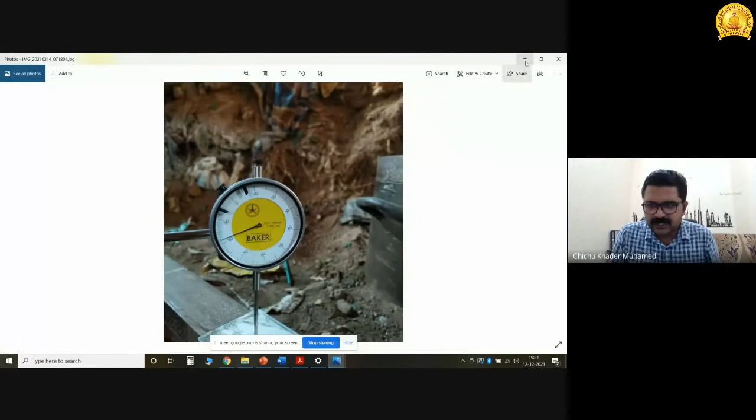So there will be a safe load already assumed for a pile load test, for the design of a pile. So if it is 50 tons, we are assessing whether the pile is capable of taking that much load, or what will be the load that the design can take. Sometimes if we are designing for 50 tons, if the design is over-designed, the pile may take more than 50 tons.

Initially, I am showing you various equipment because when I tell you some technical terms, like dial gauge or pressure gauge, you need to imagine what that is, or you should have an idea regarding the pile.

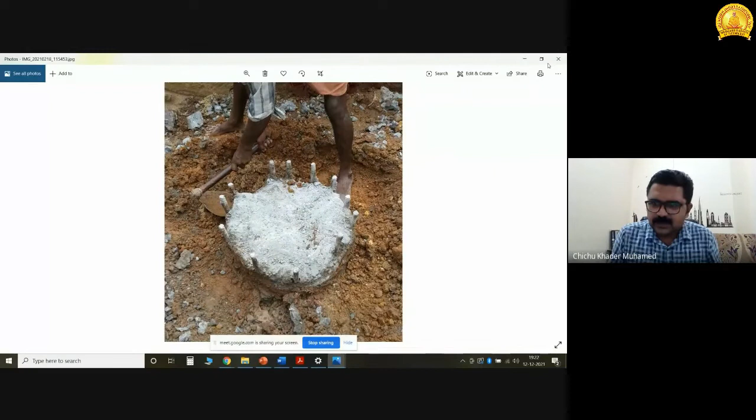This is the pile on which we are going to apply the load. Initially, we have installed the pile, then there will be reinforcement in the pile. This should be cleared and prepared, the pile head should be prepared for the load test. So this is the pile we are going to apply the load on.

And finally, what we need to get is the total settlement of the pile, then net settlement of the pile, then rebound. Rebound is nothing but, initially we will give a load, and after maintaining that load for some time, we will release the load gradually.

So initially we will give gradual load. Then after maintaining the load for some time, we will release the load, and at that time the pile will rebound. If there is some settlement, the pile will rebound from its position. So the net settlement shall be calculated, and the rebound percentage is very important. I will explain it later.

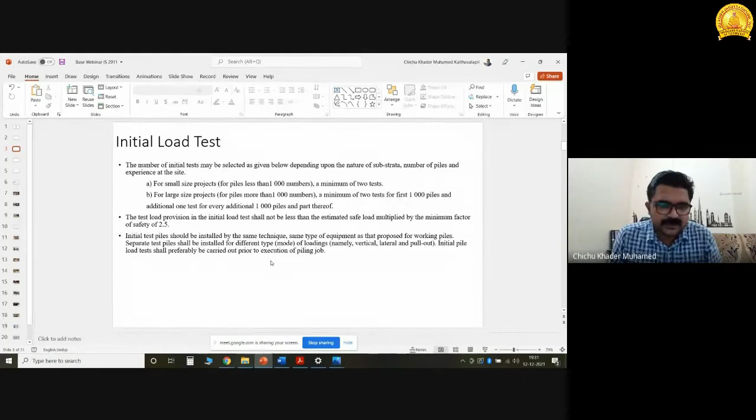So after installing the working piles, we need to check whether the pile is capable of carrying the design load. For that we use the routine load test. Routine load test means we give a load of about 1.5 times, that is the factor of safety the designer has given for the limit state method. So in the routine load test, the 1.5 times load shall be given.

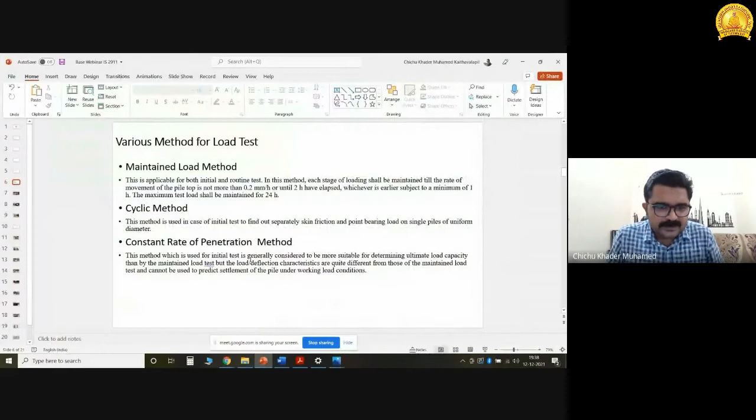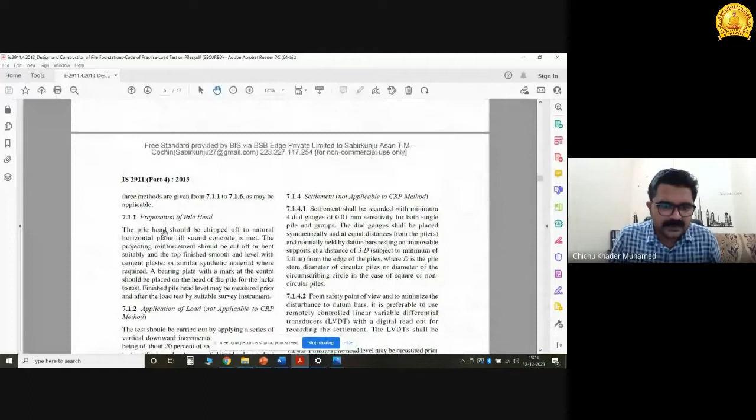Preparation of pile head: the pile head should be chipped off to a natural horizontal plane till sound concrete is met. The projecting reinforcement should be cut off or bent suitably, and the top finished smooth and level with cement plaster or similar synthetic material where required.

A bearing plate with a mark at the center should be placed on the head of the pile for jacks to rest. The finished pile head level may be measured prior to and after the load test using a suitable survey instrument - using a dumpy level or total station, we need to check the level. I'll show you the photograph.

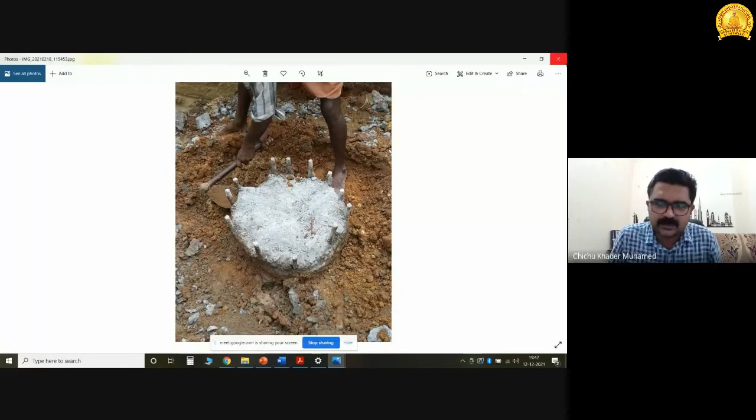Here, this is the pile chipped. The concrete is chipped to the natural horizontal plane, and these are the projecting reinforcing bars. So we will cut the projected reinforcing bar using a grinding machine.

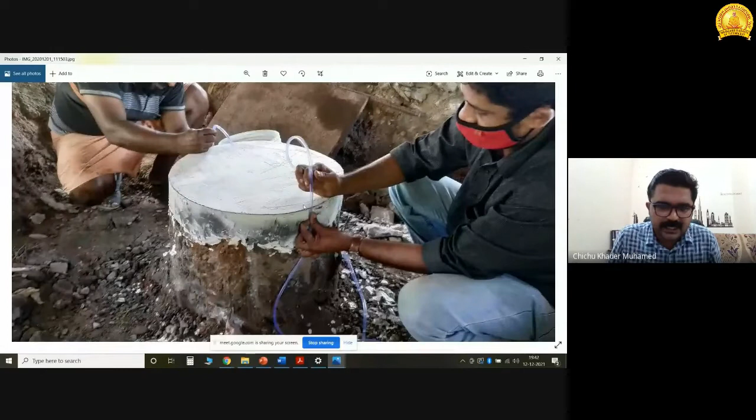After that, see, this is the pile head prepared using cement mortar, and it is level. Using a water level, we will check the level. Here you can see the pile head is made to a horizontal plane, and the levels are checked using a water level.

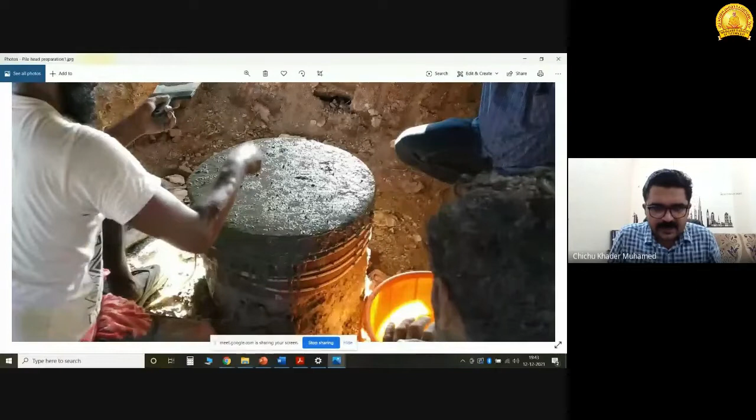And after that - this is another pile, actually we have done three pile load tests at our site - this is the mortar making it horizontal, and then plaster of Paris is applied above the horizontal plane. This is where we place the jack above the pile.

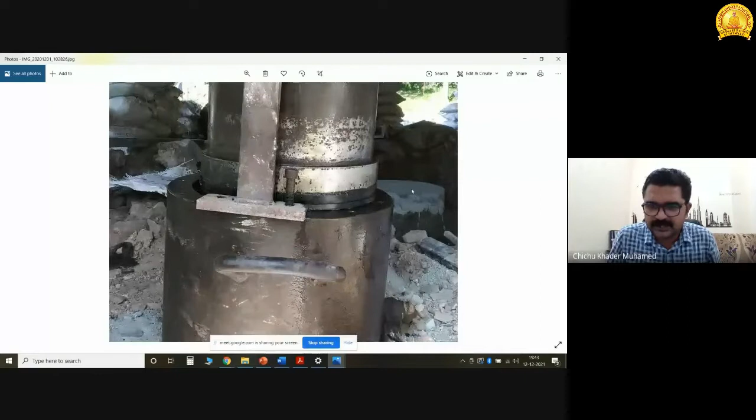So this is the jack, and you can see the prepared surface here. We will place this jack above this pile. That is the first procedure, pile head preparation - we will initially prepare the head.

Then the method statement shows what is applicable - how much load is to be applied on the pile. The test should be carried out by applying a series of vertical downward incremental loads. In the maintained load method, we give the load gradually in increments. If we need to test a final load of 67.5 ton and suddenly apply that load, the soil may structurally fail.

The pile concrete may fail. So we will give the load in each increment of about 20%. The code says about 20% - it is not exact, but nearly 20% of the load shall be given in each increment. So what is an increment? I will show you.

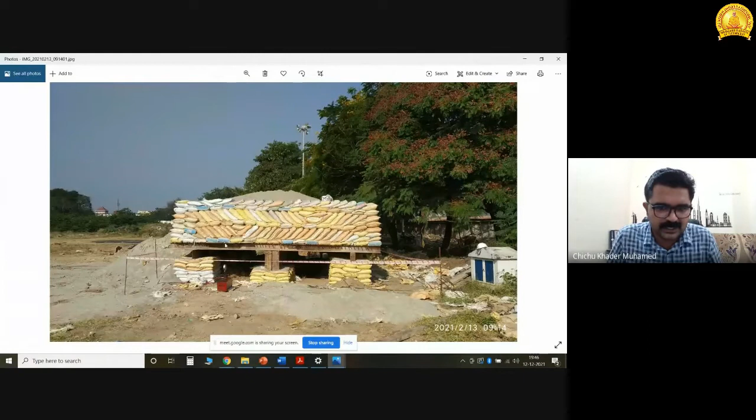So why we are giving 25% more load is when we apply the load, the central ISMB, this central section will be taking the load, and there is a chance of this to be overturned. The entire arrangement, when we lift this using a jack, I think you can see my pointer.

Can you confirm this? My point. Hello. Madam, you can see my pointer, right?

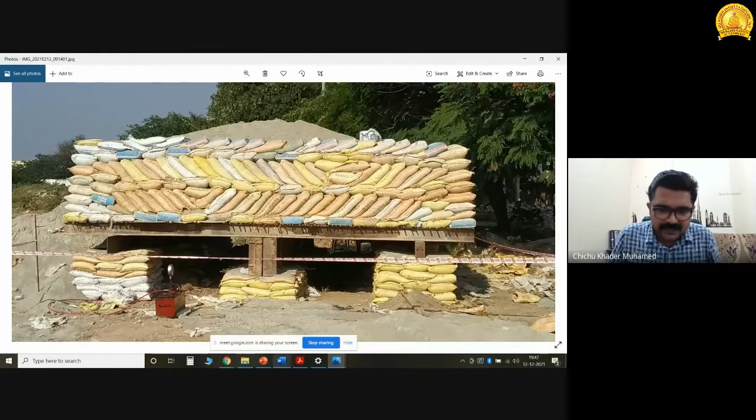When we apply the load using a jack, this section will be moving up, and there is a chance of this entire arrangement to be overturned. So we will be giving a support in these two here, and some reaction, some load will be transferring to the ground through this load. To overcome, to reduce that effect, we are giving 25% load.

So the final test load shall be 1.5 times the safe load, and the final load on the kentledge shall be 25% more than our final test load. That is in the code, clause 7.1.3.1: the reaction to be made available for the test should be 25% more than the final test load proposed to be applied. So as per the code, we have given 85 ton total load on the kentledge.

Then the next procedure is about the kentledge, how the kentledge should be placed above the pile. The kentledge will consist of sandbags loaded over a platform built up of rolled steel joists, supported clear of the test pile. This is the kentledge, and these are sandbags at the border of the arrangement platform.

In the center, we have just placed sand, and we are calculating the load based on the specific gravity: volume into specific gravity will give us the total load on the kentledge. That's how we are assessing the load on the kentledge.

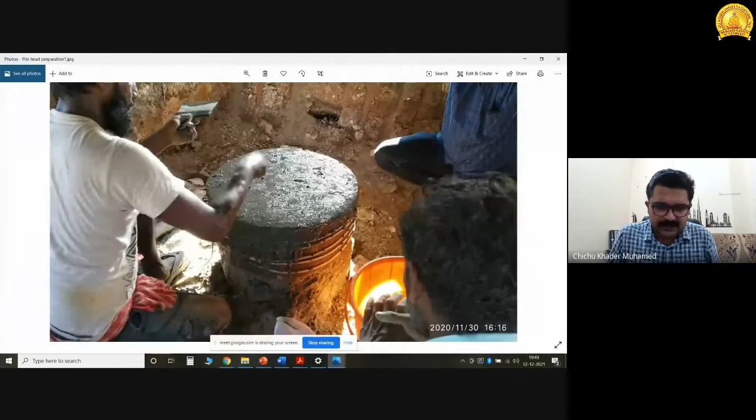And the kentledge shall be 25% more than the required final test load. Care will be taken in the placement of kentledge on platform to ensure that the center of gravity of the total load coincides with the axis of the pile. This is the axis of pile, this center point, and we will be checking that the kentledge's center of gravity passes through the axis of pile.

So after preparing the surface of the pile using a plumb bob, this picture shows how we are making that arrangement. This is the center axis of the pile, and the midpoint of the kentledge is shown here in the tape. We are ensuring the kentledge is placed at the axis of the pile, so that there will not be any eccentricity on loading. This is the arrangement for checking during the process.

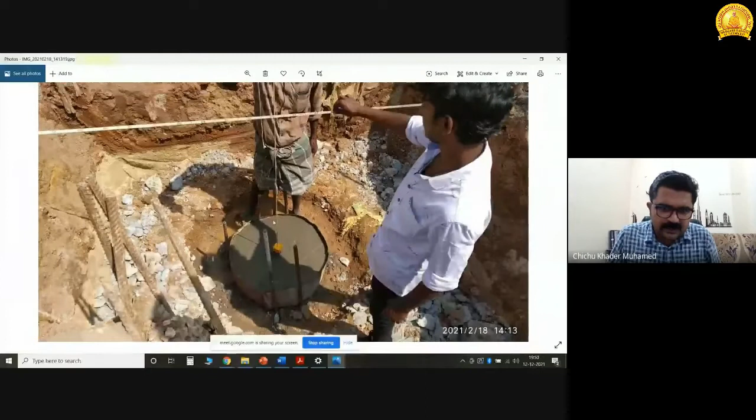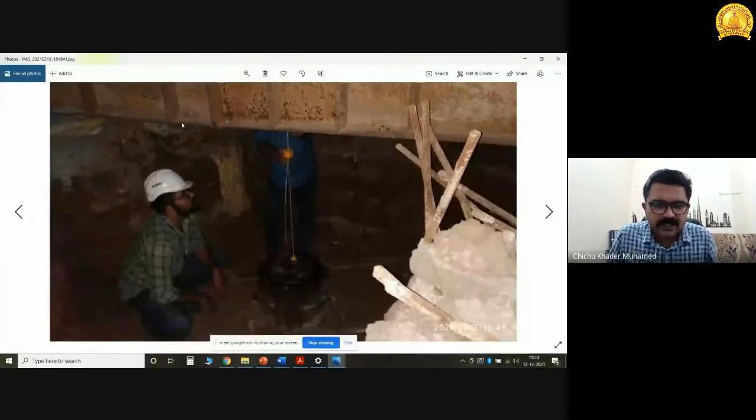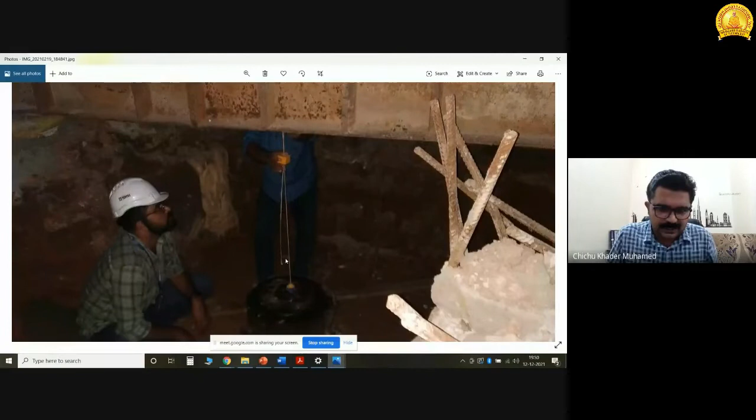From the very time of pile head preparation, the engineer in charge shall be checking every procedure. We have to check every procedure, so using a plumb bob, we are ensuring the line of loading. After the kentledge is placed also, we are checking it using a plumb bob: the center of the kentledge against the axis of the pile. That's how the kentledge is placed directly above the axis of the pile, with the center of gravity of the kentledge aligned.

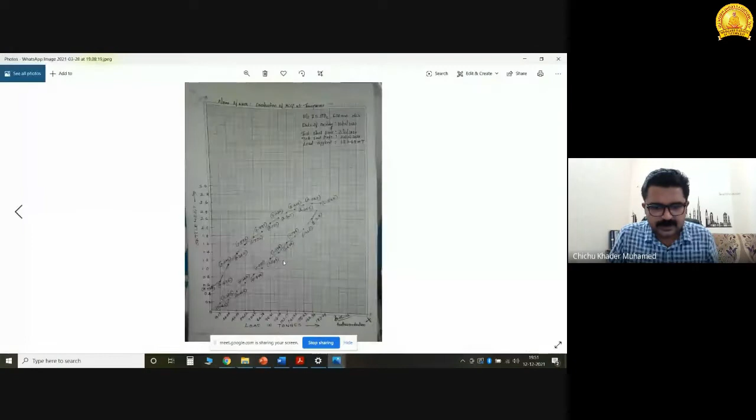I think I am showing this for the first time - the pile load test. This is the final result of the pile load test.

We need to get a graph of load versus settlement, with load on the x-axis and settlement on the y-axis. So for each load, we need to get the settlement.

For each increment, we are plotting the settlement in a graph, and this is for the rebound. This is the final settlement. Then when we release the load, it will come to 0.5. So it started from 0, then went up to 2.58 in our test, then came back to 0.56. So this is the net settlement of the pile, and from this we are calculating the rebound of the pile.

The settlement is measured using dial gauges. There should be a minimum of 4 dial gauges of 0.01 mm sensitivity, that is 1 by 100 of a millimeter sensitivity. This is the dial gauge.

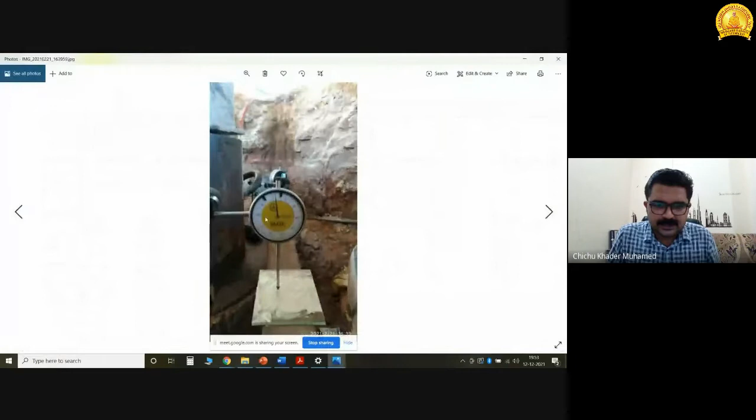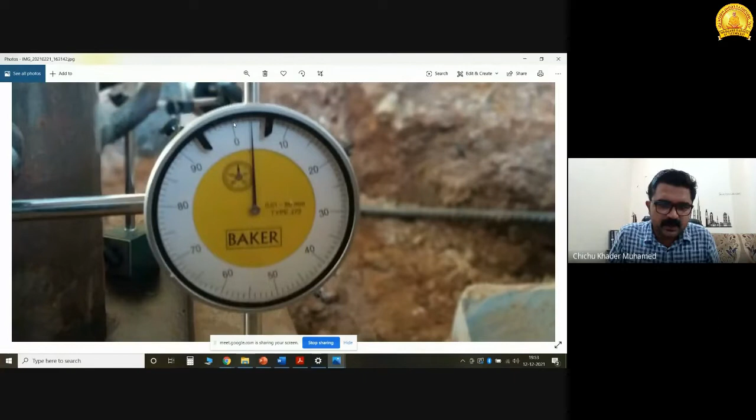This is the dial gauge we are using. Its least count is 0.01 mm, and this dial gauge can measure up to 0.01 mm to 10 mm.

During the pile test, it is very important - even a small vibration will change the reading of the dial gauge. So we are using 4 dial gauges, and we will number them like this.

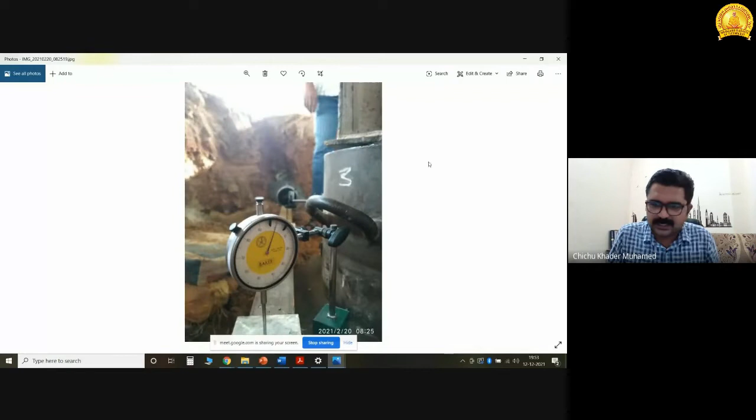This one is the third one, then fourth one. We are placing these dial gauges on a datum bar here, and one leg of the dial gauge will be placed at the pile head. This is the pile head. A 10 mm steel plate is placed over the pile head, and we will place one leg of the dial gauge over it.

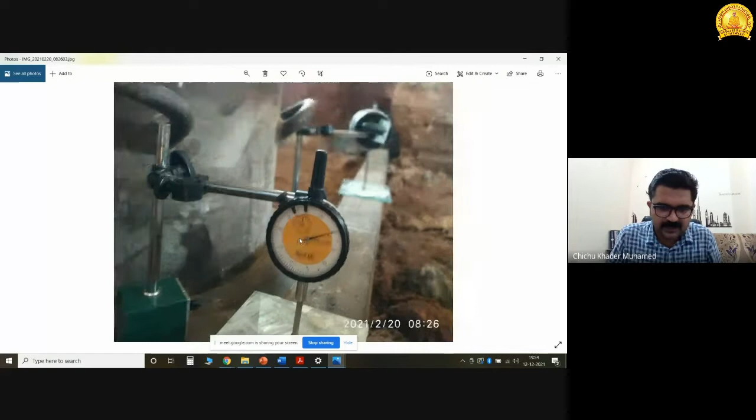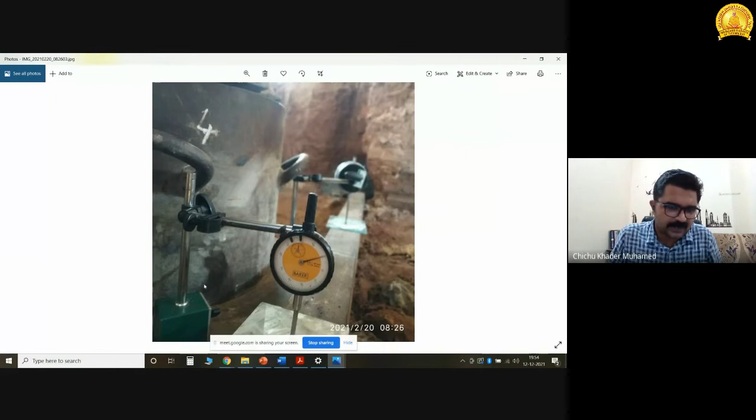Then one leg of the dial gauge will be placed on the datum bar. So when some settlement happens here, this dial gauge will show the settlement reading - this is the differential reading given. We will get the reading from here.

This is the dial gauge of 0.01 mm sensitivity. When we go inside the loading platform, this is the datum bar. There are 2 datum bars on either side of the pile. Then we will place the dial gauge here, with one leg on the pile head.

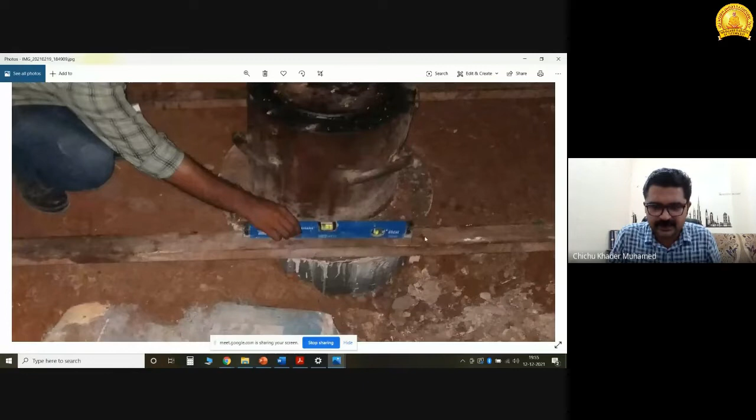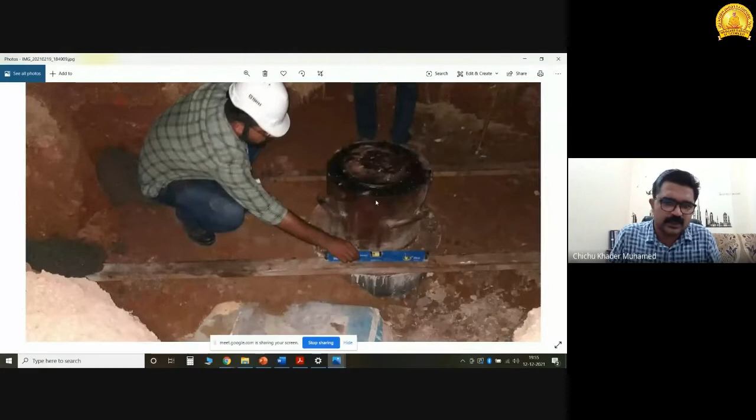The dial gauge will be placed here. The datum bar will be concreted to ensure there is no relative movement during the load test, because when we walk through this ground, there is a chance of movement of the datum bar. Because of the high sensitivity of the dial gauge, this should be taken care of very much. When taking readings, we have to take care about vibrations also.

So only 2 persons will be coming down to this area under the gantry. Here I am sitting under the gantry, so 85 tons of weight is above my head. When I come underside of this gantry, I have to be very careful that the datum bars are not vibrated due to my movement.

So it is concreted on both sides, and the levels of the datum bar are initially checked. If the datum bar is slightly inclined, the reading will differ - one dial gauge will be placed here, one here, and the other 2 on the other side. So if the datum bar is inclined in position, the dial gauges will show different readings.

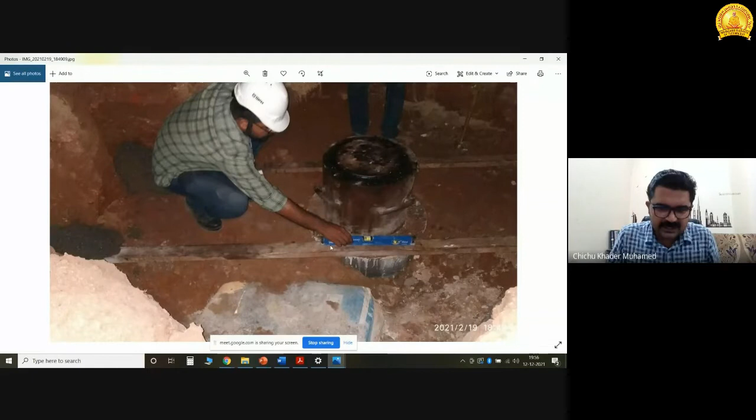That's why the datum bar and its movement is very important. This is the datum bar concreted on either side.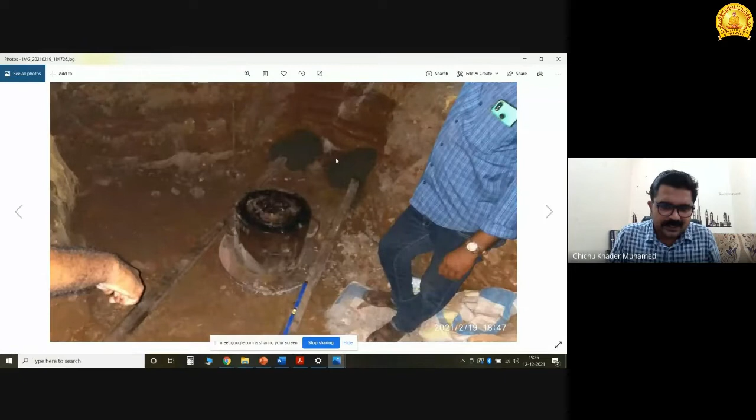For settlement observation, the settlement shall be recorded with a minimum of 4 dial gauges of 0.01 mm sensitivity. The dial gauges shall be placed symmetrically and at equal distance from the pile, and will be held at the datum bar resting on immovable support.

The datum bar will be immovable. When we were following the earlier code, the code insisted on only 3 dial gauges - this is the reading we are getting from the dial gauge reading.

So there will be 4 dial gauges, and we take the average settlement finally. That's why we place 4 dial gauges, that will give us an accurate average value. The recent code says 4 dial gauges shall be used; earlier code insisted on 3 dial gauges. Nowadays we use 4 dial gauges at 45 degrees to the pile, placed symmetrically.

Then about the load application. The test load will be applied by means of a hydraulic jack. I have already shown you the hydraulic jack. This is the hydraulic jack.

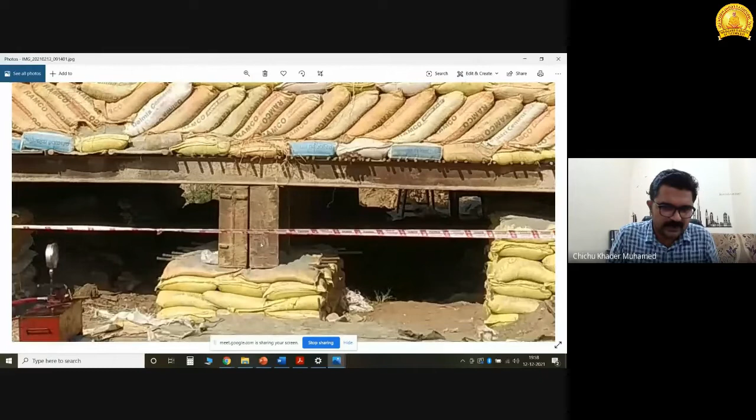This is the jack. The jack will be connected to two ISMB sections, and when we give pressure using the pressure gauge, this is the lever of the pressure gauge, I think you can see it. When we give the pressure, automatically the load goes up, the jack goes up, and the reaction of this load comes to the pile.

The code says 20% of the safe load should be applied in each increment. So here I have calculated like 20% of the safe load is 45 ton into 20%, that is 9 ton. So this 9 ton, nearly 9 ton, should be given during one increment. The calculation of how we get this 9 ton is shown here.

The diameter of the jack is 35 centimeters. Here this is the jack ram, this is the whole jack, and when we apply the load, this jack ram of the jack comes up. So this will be the area which is applying the load to the pile.

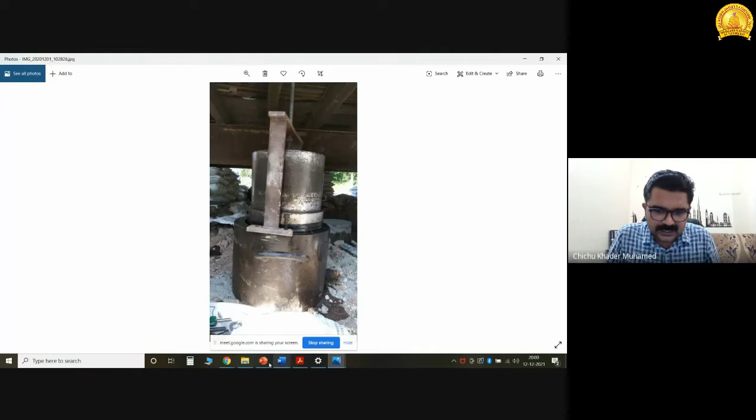So this area, here we have taken the calculation like this: area of the ram is equal to pi by 4 into d square. So we will get the area, that is 961, for 35 centimeter diameter. This is in centimeter square. The least count of the pressure gauge is 10 kilogram per centimeter square.

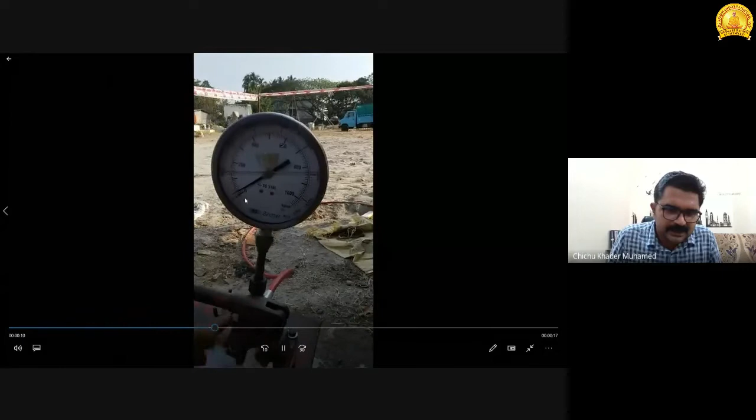Using the equation stress equals load by area, we will get the load, like stress into area. This is the stress here. One division, when we see here, means 10 kilogram per centimeter square stress is applied on the pile. So by using that, stress into area will give us the load, that is this ram area into stress, divided by 1000, since this is 10 kilogram per centimeter square. So we get the value in kilogram, divided by 1000 gives the value in ton.

So 9.62 ton is applied while we give one division increment. So the first increment will be 9.62. Like that, we will give 7 divisions for getting 67.34 ton. Here we require 67.5 ton as the final load, and because this was a routine load test, we have given up to 67.34. There is a nominal reduction in the tonnage, that is not a problem, and that is the load calculation.

So the diameter of the jack, there are various types of jacks. Sometimes if we need to give more load, we will use 2 jacks in parallel. That is a separate assembly. I haven't used it at my site.

So there are jacks of diameter ranging from 30 centimeter, 32 centimeter, 34 centimeter, 35 centimeter. So according to what load we need to give, we have to select the jack according to the diameter of the ram. So that diameter of the ram will give you the load for one division. One division in the pressure gauge means we are applying 9.62 ton.

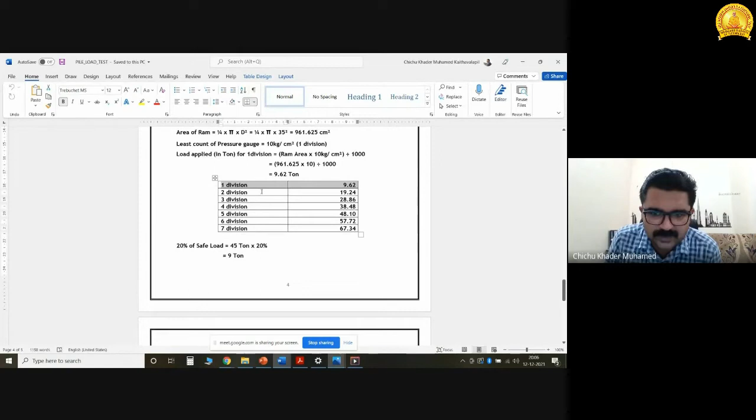If the reading is more than 0.2 mm per hour rate of penetration, otherwise we will give the next division, next tonnage, if it is less than 0.2 mm per hour. So this is when the loading has reached the test load.

It will be maintained for a period of 24 hours, and the settlement reading every 1 hour will be noted during this period. Here I have given the final increment, 7th division, and after that I have taken the readings every 1 hour: 5:15, 6:15, 7:15, 8:15, and up to 24 hours. I have maintained the maximum load, 67 tons, and recorded the reading each hour. So this maintain-the-load method will take 1 day.

Overnight, we need to check for the readings, we have to be at the site overnight. Night time also we need to take the measurement. So for 24 hours, we will maintain the load, take the reading, and record it here.

Here you can see the settlement after the final load has been given. The settlement varies over 24 hours: it's 1.005, then 1.02, then 1.027 - an increase of 0.007 mm. So the settlement is getting increased over the 24 hours, and each hour the reading will be more as we maintain the load.

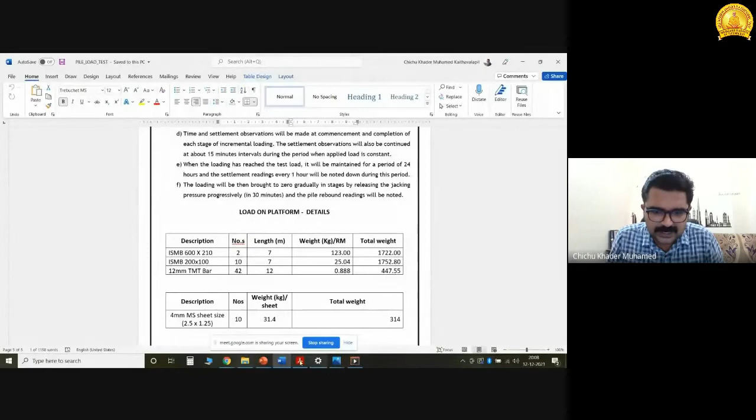This is the process of releasing the load.

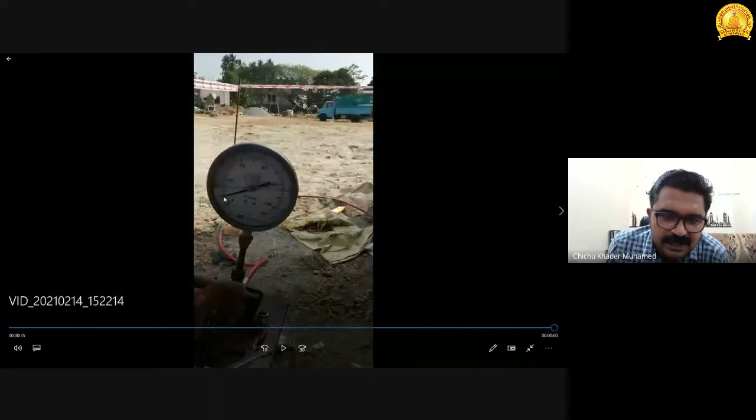See, this jack pressure will be slowly released here, and you can see the pressure gauge reading comes down. During releasing, the jack will be released using a spanner, and the load comes down. When it is one division down, we will again tighten the jack.

So the load comes down to one division, and like that 7 divisions will be here. After fully loaded, the division was 7, and in each hour, for every 30 minutes, we will release one increment, coming down up to 0. This is the final settlement, and after releasing, there is a settlement. The difference in settlement is known as the net settlement of the pile.

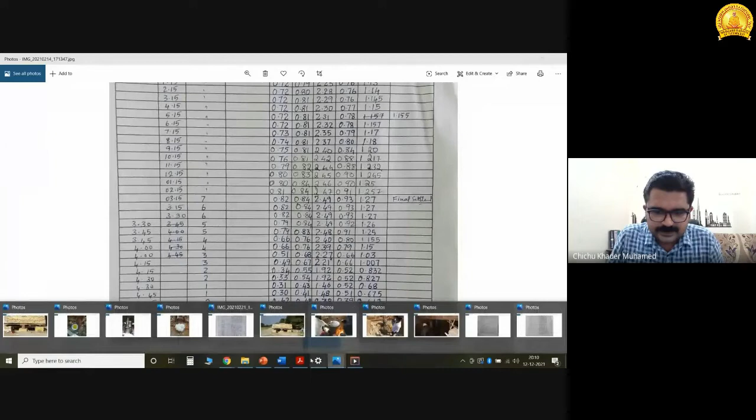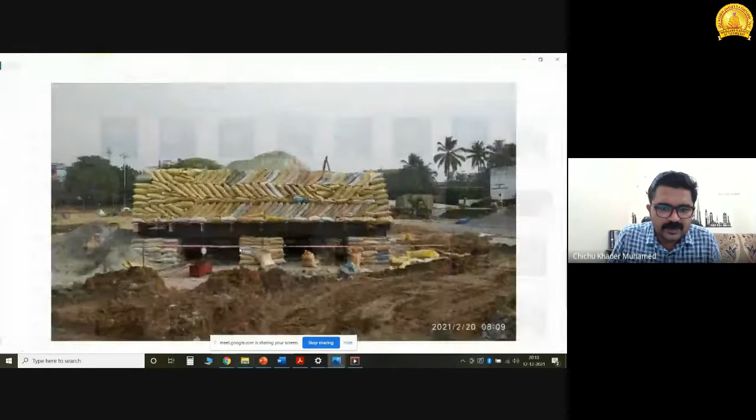This is the calculation for load on platform. The whole test is based on the load which is given on this platform. So this is the platform, and the calculation I told you about, the volume of sand into specific gravity will give the load of sand, and all these steel sections' load is also coming on the pile, so we need to calculate that also.

So this is the calculation. There is one ISMB 600 by 210 in the center. This is the first load we are calculating. There are 2 numbers as 1 unit, combined together. So the load of that ISMB is given. The length of the ISMB is 7 meters, so the running meter length is 123 kilograms, which will give the load.

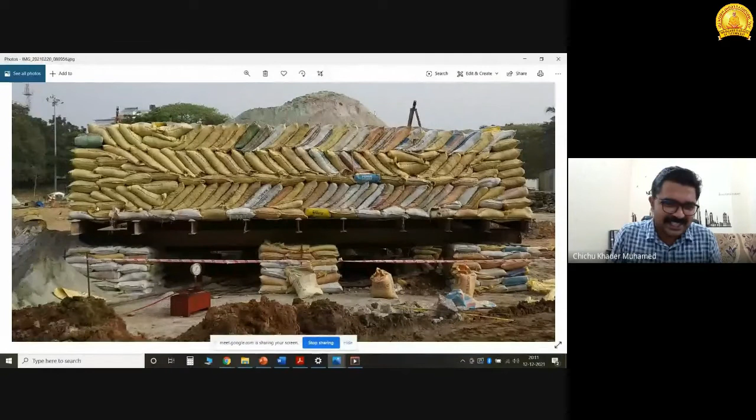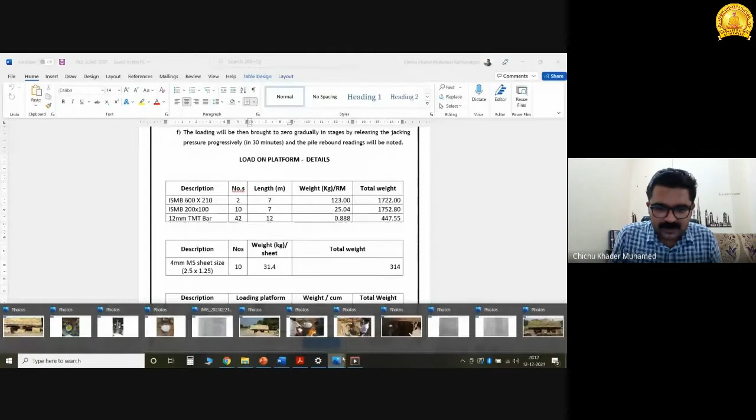Then 10 ISMBs above that, this other longitudinal section. So on the center ISMB, 1, 2, 3, 4, 5, 6, 7, 8, 9, 10. This is another photograph from one of my other sites, not for this calculation. So there are 7 meter length, 10 ISMBs, and the weight is 25 kilograms per running meter, so we will get the total load here. There are also 12 mm diameter bars placed above this ISMB.

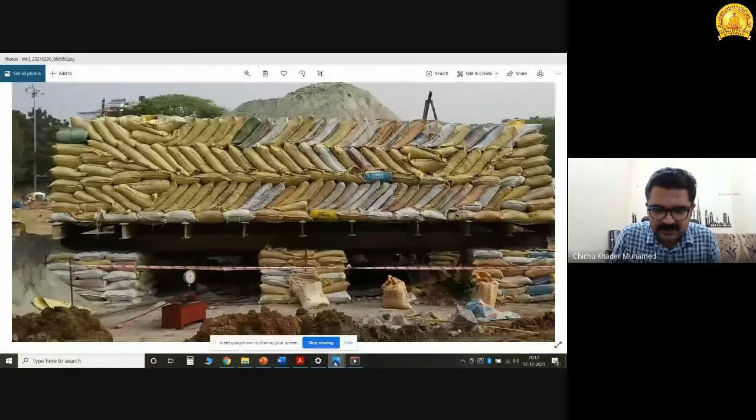So for supporting the platform here, under this, we have placed - you can see this from this photograph - 12 mm dia bars placed here. These are HYSD bars placed over this ISMB, so that weight also will come to the pile when we apply the load. These are the ISMBs placed over the platform kentledge, so that weight also we have considered here.

Then the 4 mm MS sheet, that is 4 mm MS sheet, is placed above here for supporting the sand. The MS sheet is placed above the ISMB bar, so that weight is also considered during load application, so we need to account for that too.

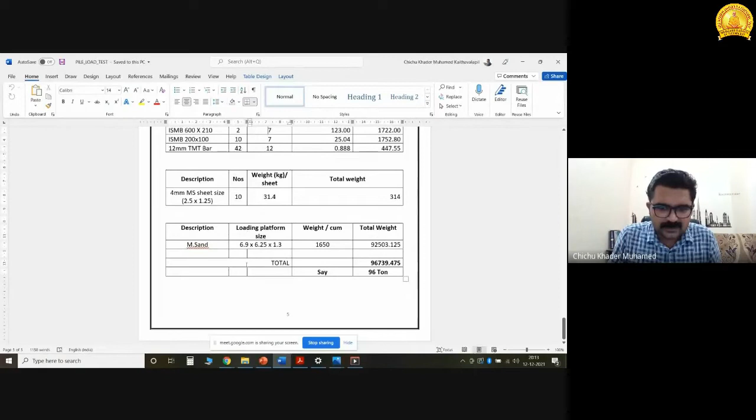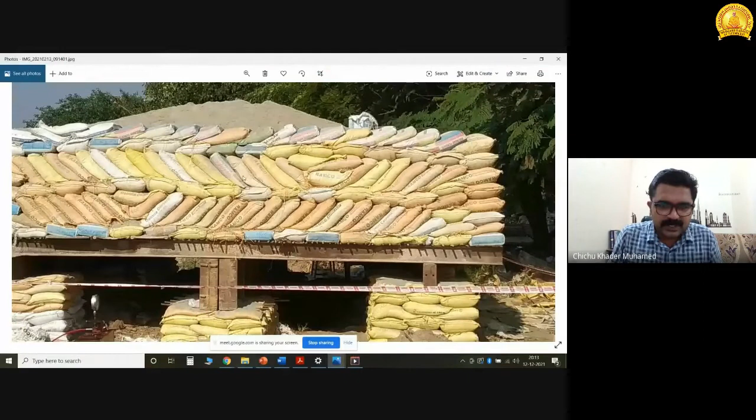Then the weight of sand - that is the total area of the kentledge, into 1.3 meter height, which gives into unit weight. We have taken the unit weight of the sand, not specific gravity, as 1650, and that gives the total weight.

So actually this is 96 tons load above the kentledge, and we require only 85 tons. Required load on kentledge we have already calculated as 85 tons, and after all these arrangements there will be 96 tons, so we are safe - more load is there.

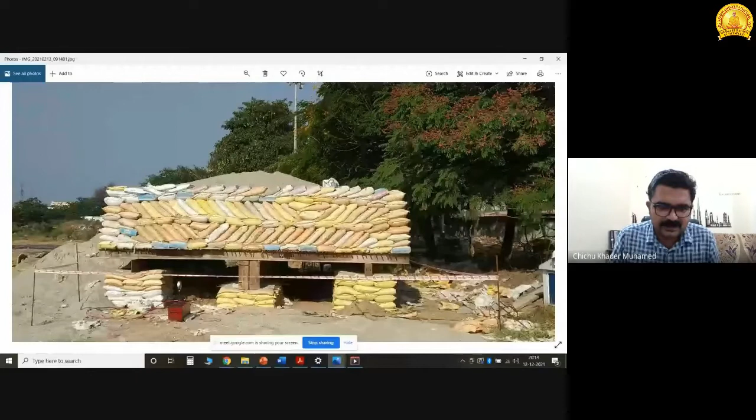The problem is if there is not more load than we are applying - that is 67.5 ton load - if there isn't that much load here, this kentledge, when we apply the load using a jack, will go up and overturn, causing safety issues. So normally we give more load than required above here, so that the kentledge will be stable. That is the procedure, the methodology, method statement of the pile load test.

Maintain load method.

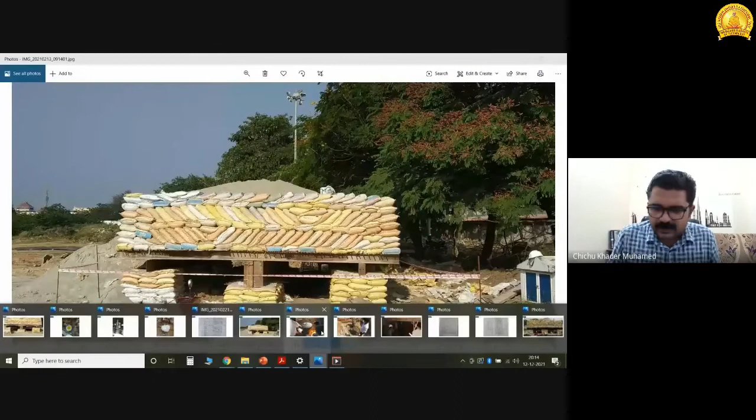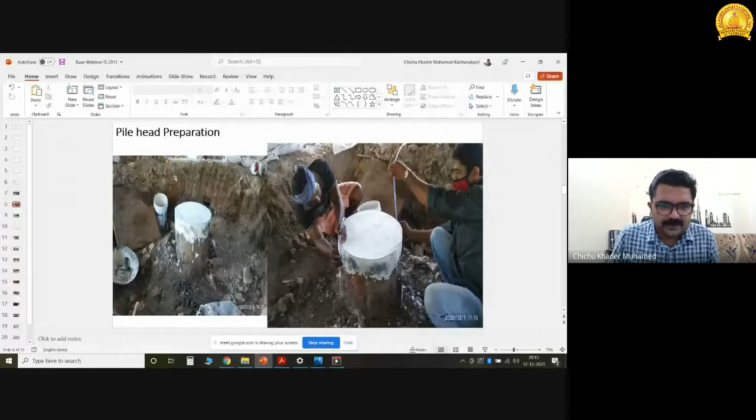So these are, I have put it in the PPT also: pile head preparation, then this kentledge load on kentledge calculation, this is the axial checking of axial load in the pile - the axis of pile and kentledge middle section should be verified.

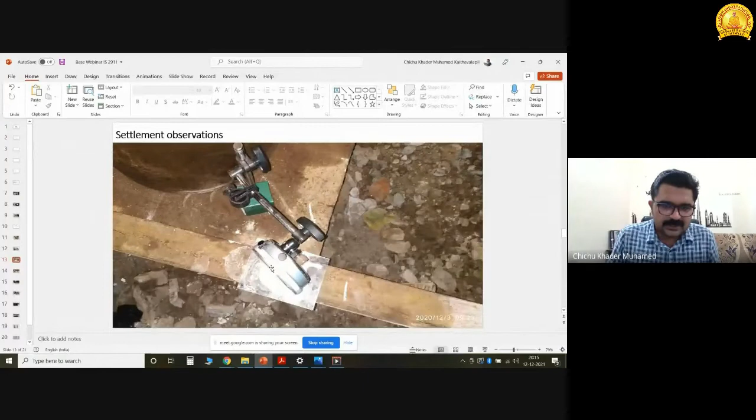Then these are the dial gauges, and this is the arrangement - this is how we place the dial gauge on the datum bar. This is how we will give a number for each dial gauge, and the datum bar is checked for horizontality.

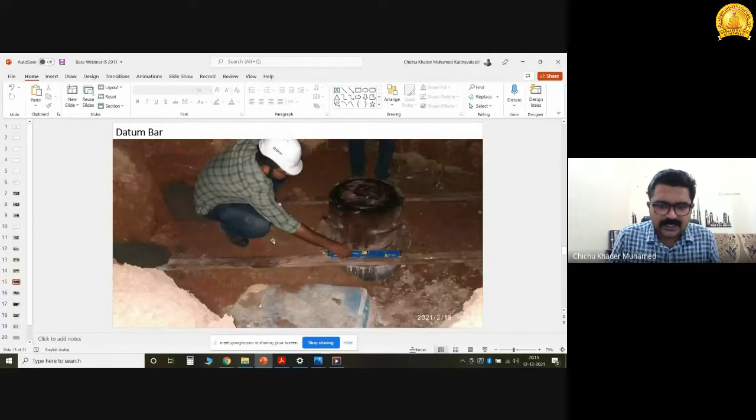This is the loading jack, and this is how a loading jack will look like after the final load - the ram will come up, and here we can see the datum bar. This is the arrangement of loading. This is the tube through which hydraulic oil comes to the jack and load is applied. So this is how the jack will look after the final load.

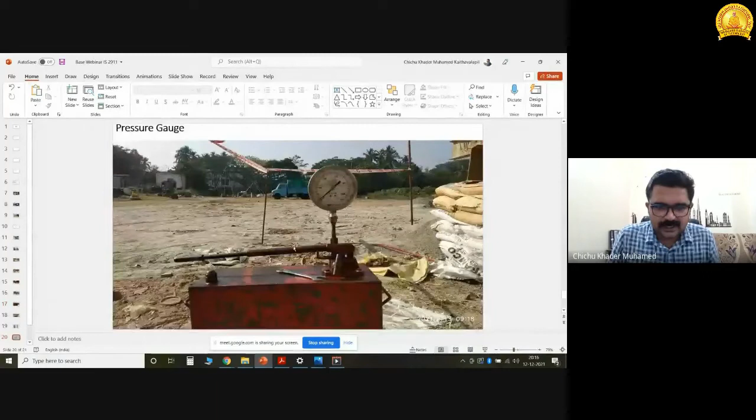This is the center I have already shown you. Then this is the pressure gauge. We are giving each increment of the pressure gauge. For each division, this is 10 kilogram per centimeter square.

While we give each increment, we will give load using this lever. This is the lever for giving load to the jack, and this

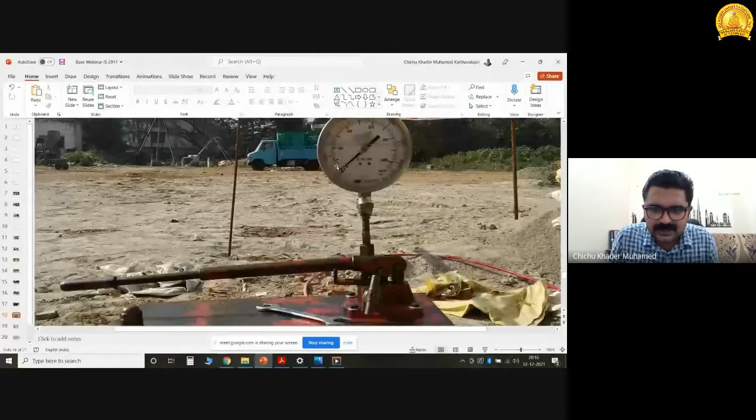each increment will be shown in the pressure gauge. And this is the pile load test data. I will give you a brief on that one. Here we have done the test on 13/2/2021 at 8:15 a.m.

We started by giving a settlement load of 20% as a seating load. That will not be taken into account. At 8 a.m. and after that, at 8:15 a.m. we will give the first increment.

This is the pressure gauge division. That is one division we have given. Load in tons is 9.62. Then dial gauge readings are taken. Here you can see the first dial gauge shows 0.00 mm.

Then the second one also shows 0.00 mm, and the third one is 0.06 mm. The fourth one is 0.00 mm. So the average settlement is taken here, A plus B plus C plus D by 4, and for the next 15 minutes we have taken various readings and recorded them here.

After 1 hour, at 9:15 we checked the reading. It is only 0.19 mm. As I told you, if in an hour the settlement is more than 0.2 mm, we need to maintain the load for 1 more hour. Here it is less than 0.2 mm.

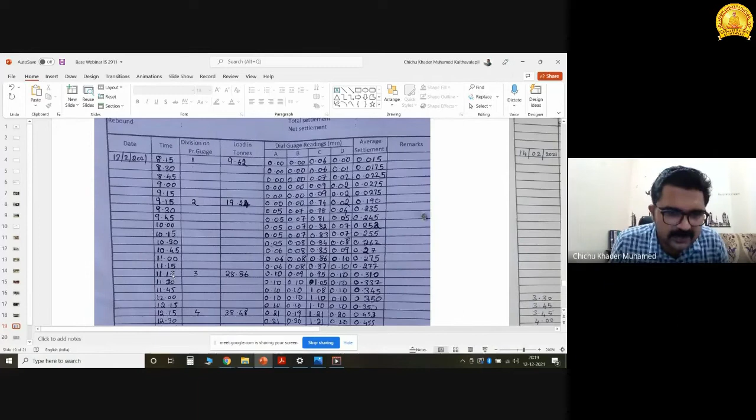So that is the difference, that is the procedure for giving increment of load, and after 2 hours we can give the next increment. So here you can see the settlement.

This is the data sheet, and here at 8:15 we have started. We have given readings 1, 2, 3, 4, 5, 6, 7. After that, we have maintained it for 24 hours.

After this, at 3:15, here you can see at evening 3:15 we have given the final load, the 7th load. On the next day, 14/2/2021 at 3:15, we started releasing the load. So for 24 hours we have maintained the load.

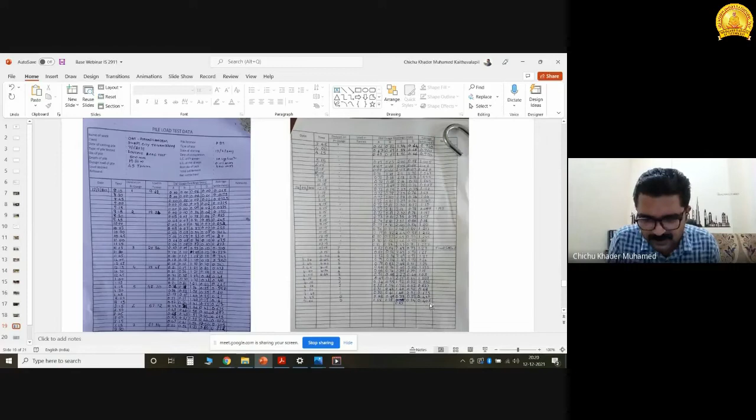And this is the 3:15. This is the final settlement, and at 5 o'clock the load test is over, and the final settlement after rebound is 0.407. So the difference between 1.27 and 0.407 will give you the net settlement.

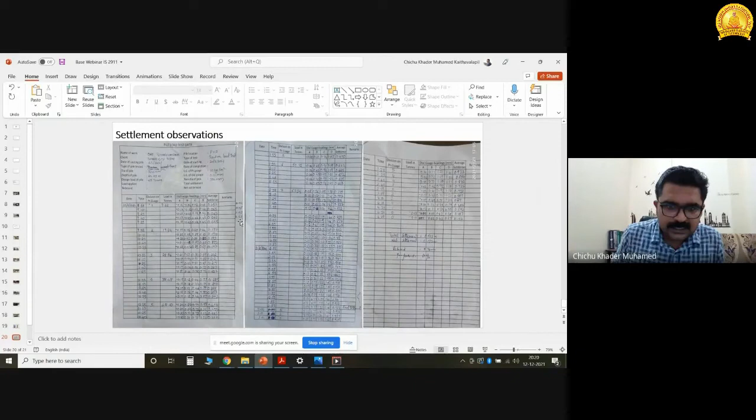This is another load test calculation. So these are the settlement observations. Then from this settlement observation, we will be plotting this curve.

Using this curve, the structural engineer or the geotechnical engineer who has designed the pile will verify the load test data, and they will be deciding if there shall be any change in the design or any change in the method of piling. They will decide like that.

So the IS code says, for the safe vertical load on a single pile, the initial load test should be at least the following: for up to 600 mm diameter pile, the displacement is 2/3 of the final load at which the total displacement attains a value of 12 mm.

That is, up to 600 mm pile, we can allow a settlement up to 12 mm, and we will take the load at which, from this curve, we will check for the settlement.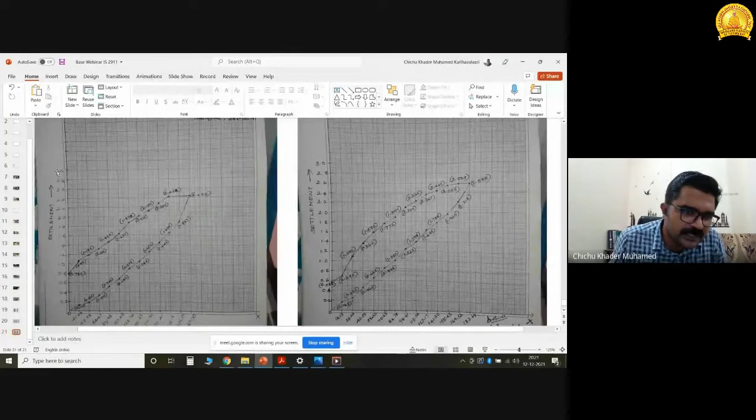So this is up to only 3 mm we have plotted the load for initial load test; for 12 mm settlement, somewhat above on the y-axis of the graph, it will be getting, and the corresponding load will be taken, and 2/3 of the load will be taken for design of the pile.

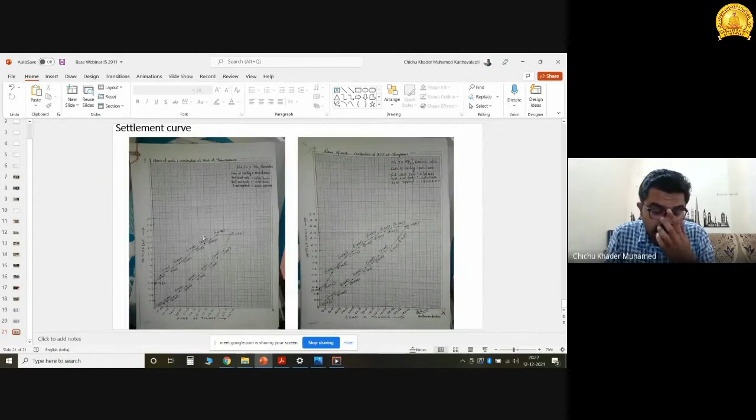That is the safe load carrying capacity of pile - 2/3 of the final load at which the total displacement attains a value of 12 mm, unless otherwise required in a given case based on nature and type of structure, in which case the safe load should correspond to the stated total displacement permissible. That means 2/3 of the final load at which the total displacement is for piles up to 600 mm diameter, and for above 600 mm diameter, 2/3 of the final load at which 18 mm settlement occurs. So this is the difference.

Considering the diameter of the pile up to 600 mm, if we are getting 12 mm settlement for 100 tons, for example, we will be taking the safe load as 66 tons. For more than 600 mm, we take the load at which 18 mm settlement happened, factor it to 2/3, and that will be the safe load of the pile.

So this is the procedure and some practical considerations during pile load test and the final result of the pile load test. As of now, I have discussed the maintain load method, and there are some demerits of this maintain load method. There are merits and demerits for both methods.

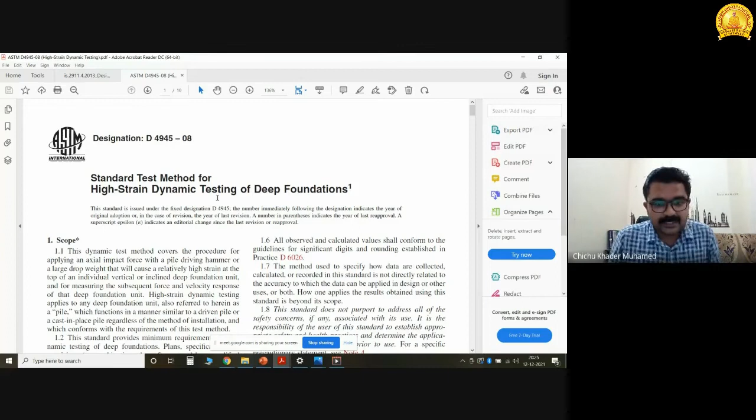The merit of this high strain dynamic testing method is it will take less time. After installation of the pile and achieving the strength, we can do the test - it will take about 1 hour for this high strain dynamic test. Recently at one of our sites we have done a high strain dynamic test, and I will share the videograph of this test.

So this is the test arrangement. There is no Kentledge here, you can see, and there is a hammer. This hammer is weighing 1.5 tons. We will place this hammer above this pile head, and the hammer is weighing 1.5 ton of weight.

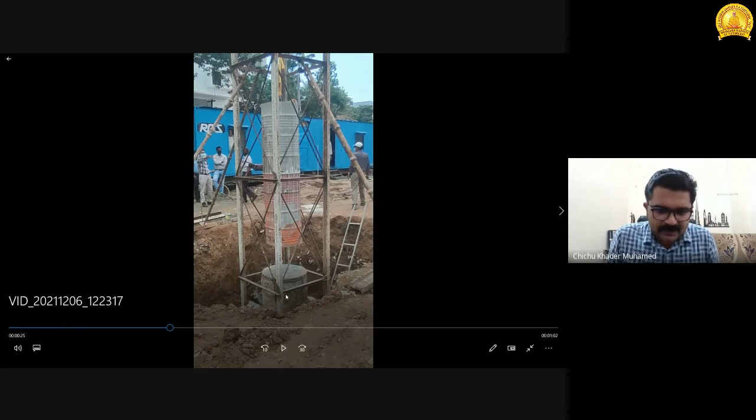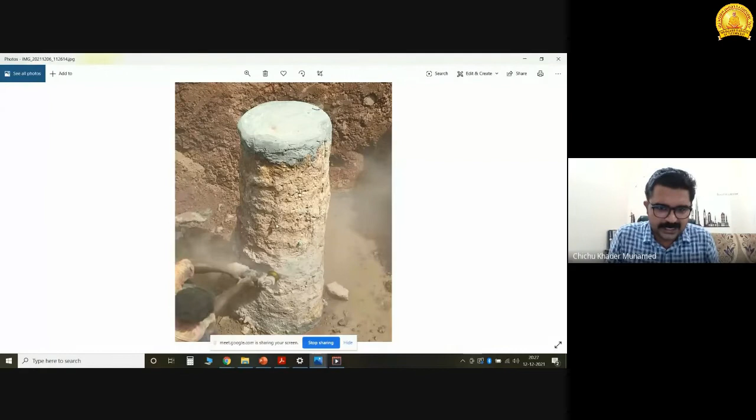So using the impact load, we can know what is the settlement. This is the pile to be tested, and the same head preparation has been done here. This finishing, this grinding is done for placing some sensors. I'll show you the sensor - this is the sensor used for the pile.

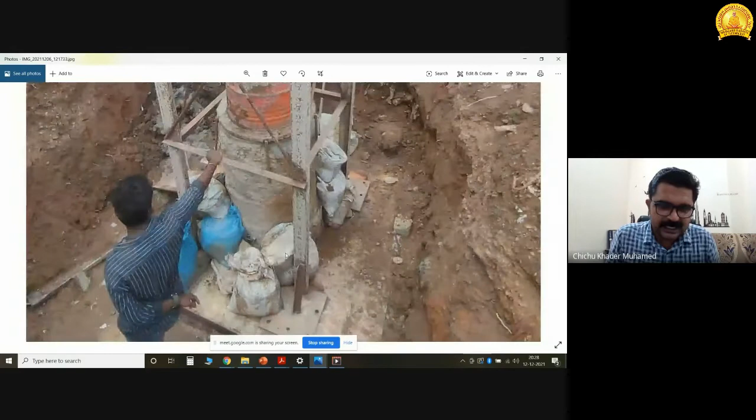So when we throw the hammer above the pile, this hammer will be put above the pile and it will be a free fall. When we put this hammer above the pile, there will be some impact. Dynamic load will be happening, and that dynamic load will be assessed through this sensor, which will be connected to a pile driving analyzer. This is the pile driving analyzer. So we will get what is the load applied, and what is the resistance of the soil - everything will be shown from this pile driving analyzer.

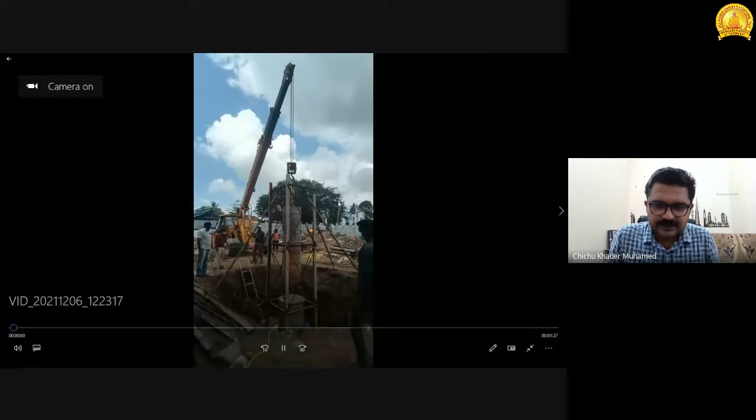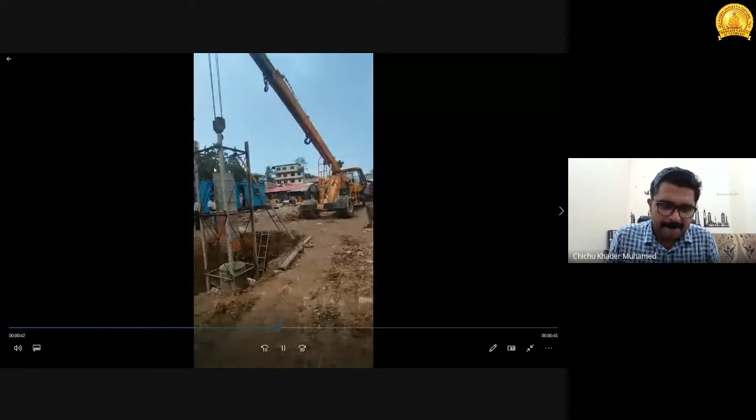So I'll show you the video. This is the arrangement. The sensor is covered using this sack, and the pile head is prepared, and a 10 mm, 12 mm plate is placed above this one. For getting a free fall using a crane, the hammer is placed above this pile, and to get a free fall, we light up this rope using fire. The rope is given fire.

This impact will be measured using the pile driving analyzer. This is a procedure for high strain dynamic test, and here you can see the effect of the impact on this pile in the driving analyzer.

Can you hear the audio of this video graph? No, sir, we couldn't hear the audio. Okay, I think because I am sharing my screen, so the audio is not coming through. Actually, I don't know, some technical issues there.

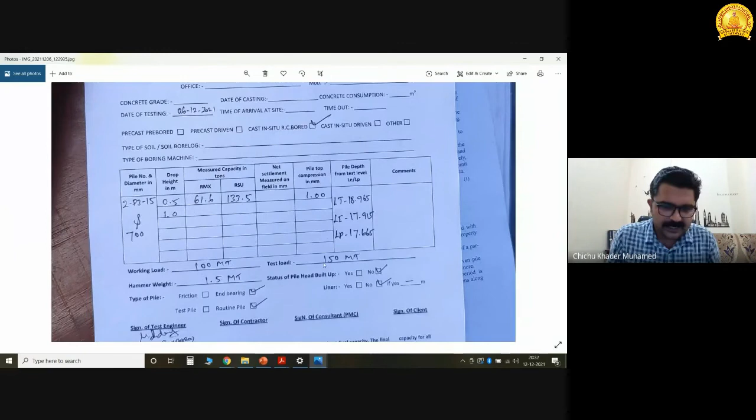Here the calculations are shown, like the working load. The pile was designed for 100 MT and the test load was 150, because for dynamic load test, according to ASTM code, 1.5 times the load should be applied.

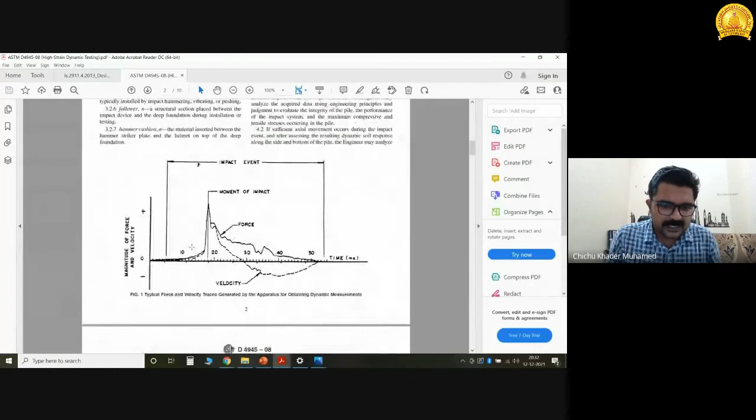This is the graph we have shown in the pile driving analyzer, and this is the arrangement we have seen. These are the sensors at 1.5 into diameter, attached to the pile. So this is at 1.5D below the pile, attached to the pile at a depth of 1.5 times the diameter.

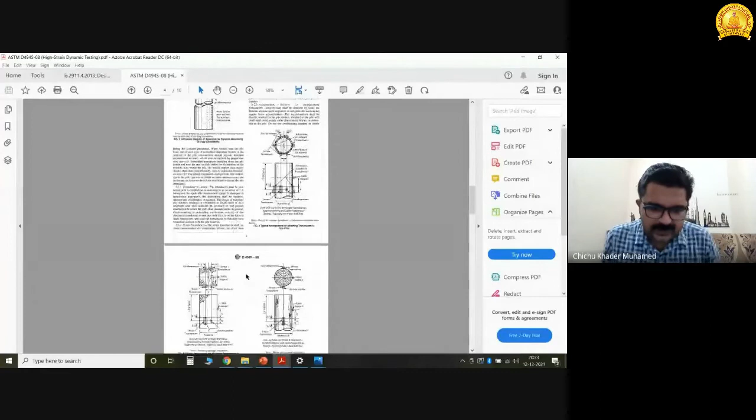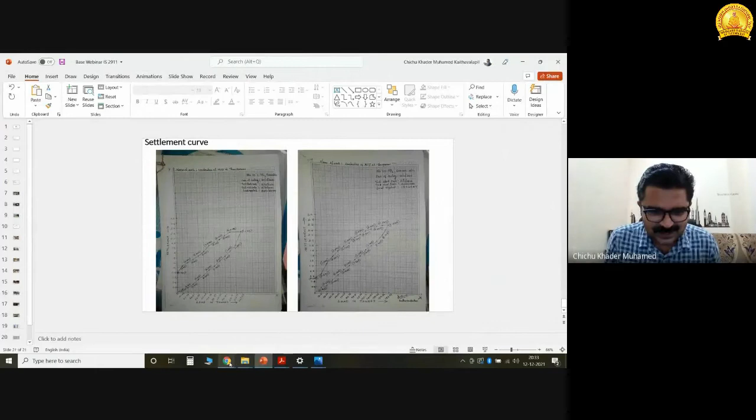So that's the procedure for dynamic load test. Actually, I have done it only one time, so that's why I couldn't explain it to you in that much depth. Now, if you have some questions, we can discuss them. Hope the thing is clear to you.

Has anyone got some queries? The answer is no, I think.